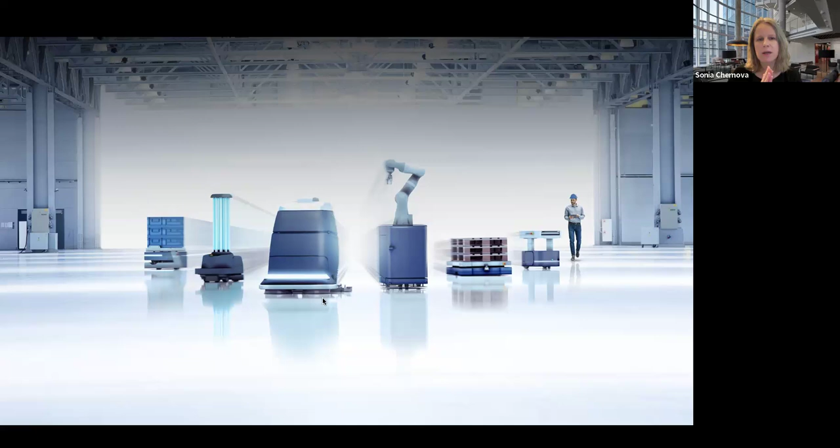The way I'm going to structure my content here is to use this lovely summary put together by some of the venture community, credited at the bottom. It talks about the different waves of adoption, or different stages of development, of what we call embodied AI or robotics, whatever term you want to use. I prefer robotics personally, but embodied AI makes a lot of sense as well. We'll talk about these as we go.

I'm going to spend more time on the current stuff, of course, but I want to go slowly because it's really important to understand the context of where we are by understanding where we came from. So let me start with...

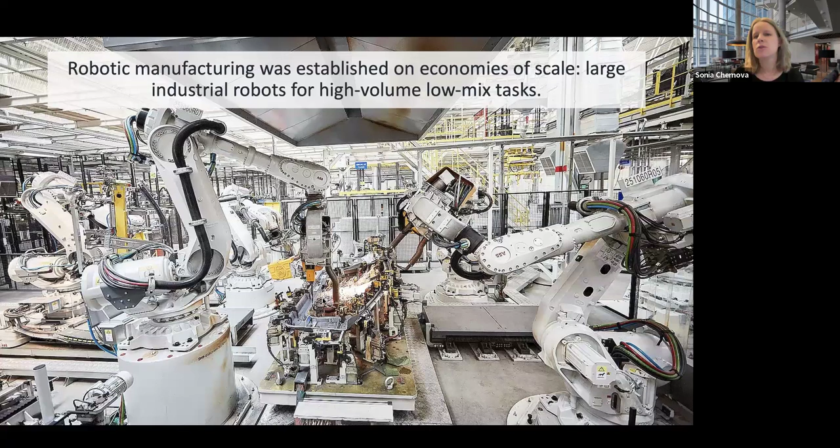Very traditional, what we would call at this point old robots. This was in the 80s and 90s, when we really saw the adoption of robots. I just have one picture I want to show for that, and I think this picture captures those types of systems.

These were very large, heavy machines, very high power, high voltage. If you pay attention, there's a wall here, a mesh wall — people are not allowed in this space. These robots are very fast, they're incredibly precise, which is wonderful. They spurred entire new innovations in car manufacturing and everything else.

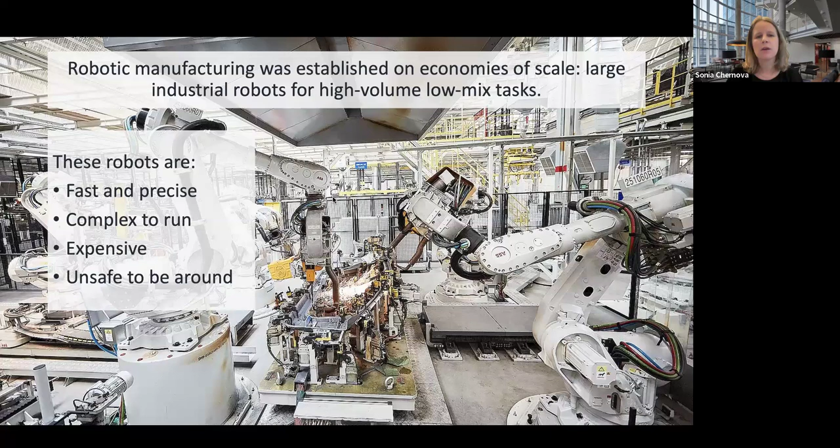But they were very complicated to run and remain complicated. Many of them are still operating. They require specialized software, specialized training, specialized engineers. And the biggest factor was you had to design a factory around them — you couldn't put people in the same space. They weren't movable by any means, they're very, very heavy. So this is where we were in the 80s and 90s.

That's all I really want to say, other than that, okay, we've changed — the world has really changed. So let's look at what happened in the first 15 to 20 years of this century, roughly since the year 2000. A lot of my conversation here will focus still on manufacturing, but also logistics, because those were the big success stories of that time period.

If we're going to look at robot arms, just to contrast this with the previous picture, what you see now for robot arms compared to those giant industrial ones are what we call cobots. If you're not familiar with the term, it's quite important in robotics.

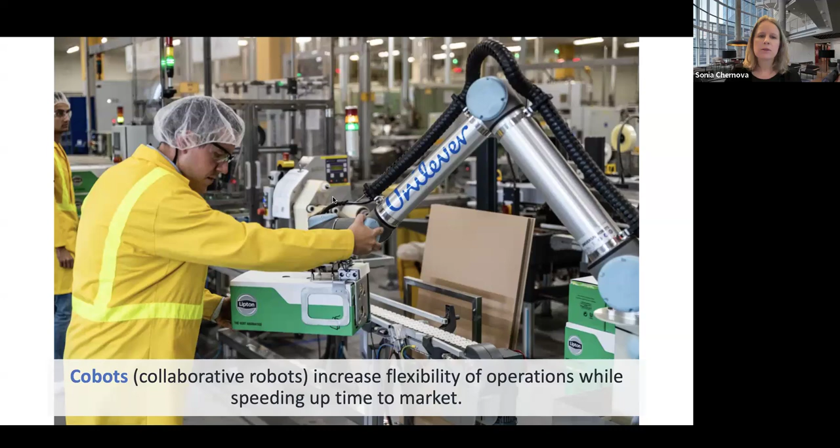Cobots just means collaborative robots. And these are still robot arms, but as you can see, people can be right up close to them. They can touch the robots, push the robots around, and teach them. Here, I'll show you a quick video.

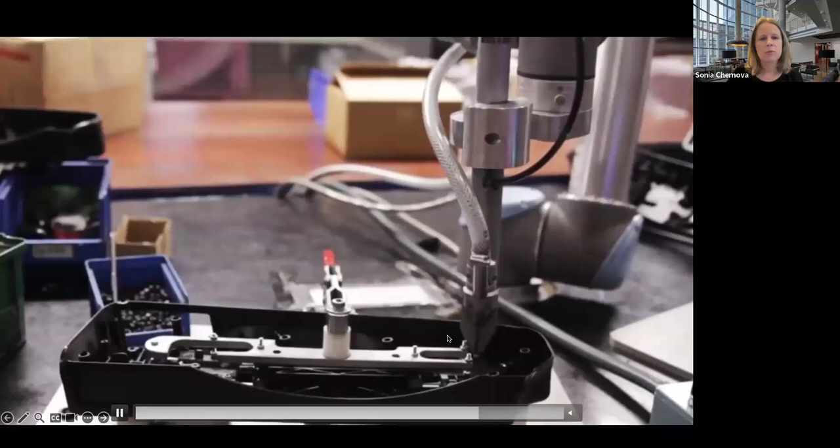But you can see these robots are doing all kinds of tasks, and people are right there with them. There's a person right next to it. This robot's going to apply what looks like solder or glue, fetch materials for a worker, whatever it is. So really it's changing the paradigm of how we view robots.

Instead of people in one place and robots in another, we're bringing them together. And this type of product, a cobot, is available from pretty much every major robotics manufacturer that produces robot arms - European companies, Asian companies, US companies.

Now, they're smaller, so they don't entirely replace all the big things. We still need big robots for giant car parts or something else. But for many manufacturing and logistics tasks, picking things up and moving them, these work really well because they have a payload - the bigger ones are probably close to 15 kilos, which is not bad for most things.

They have a smaller reach, about 1.5 meters most, and most of what they do is much closer than that. So if you need a bigger reach and a bigger robot, you're going to have to move to something bigger, more traditional, more dangerous, likely needing to be caged. But for smaller tasks, we have cobots. This has been a huge innovation in the mid to early 2000s.

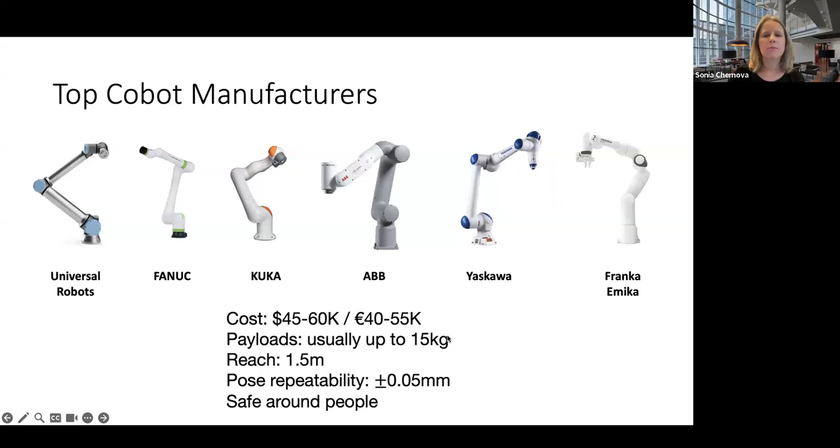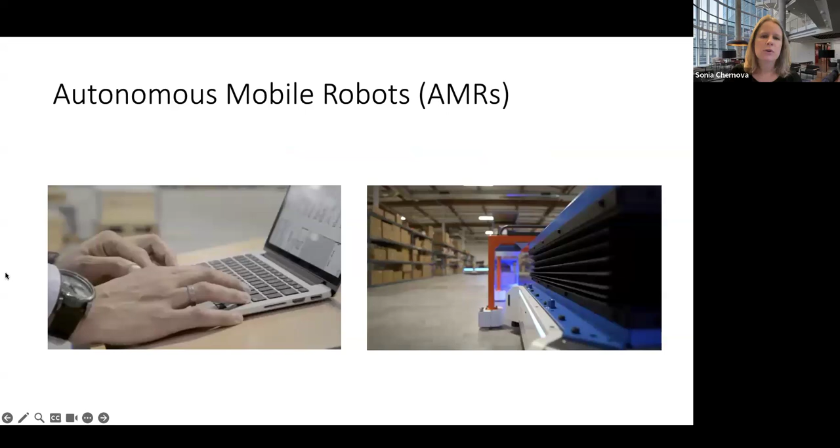At the same time, we also developed more and more intelligent navigation platforms - what are called AMRs, autonomous mobile robots. So we see more and more warehouses and logistics operations where people don't have to walk long distances, but instead use small transport vehicles like this to carry packages, or the robot can actually lift an entire shelf unit and bring the shelf to the person.

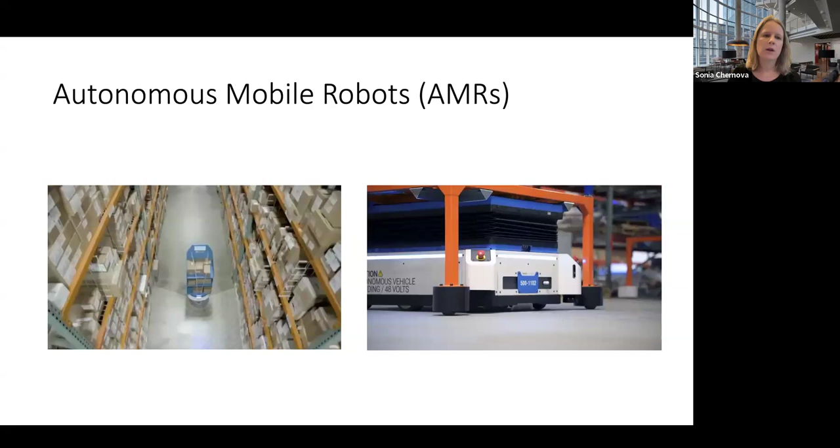There are many different variants of these technologies, but all of them integrate nicely within current warehouses and distribution centers. You don't have to change a lot. They can drive around other people and vehicles, and they save a lot of time and effort, and they self-charge and so on.

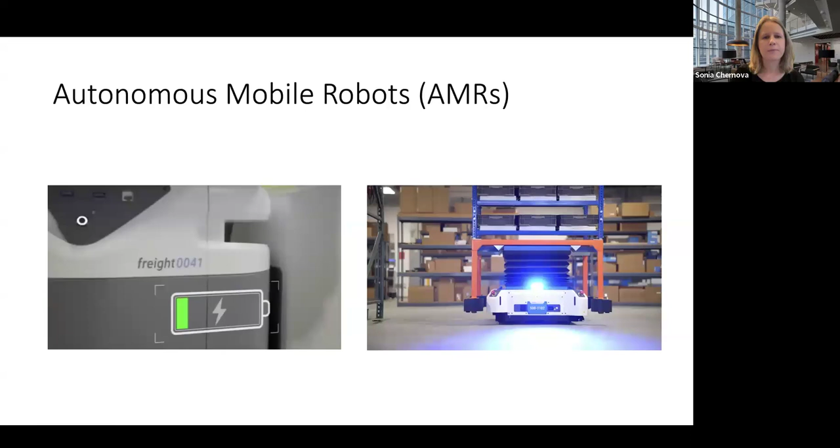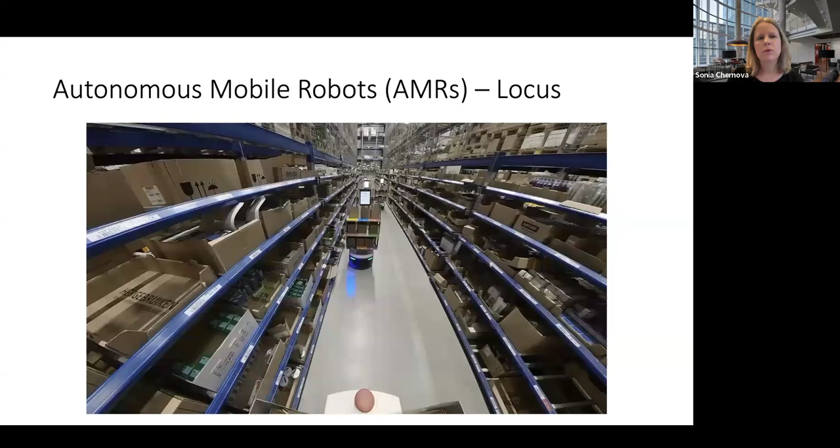Here's a quick example of one. This is a pharmacy or pharmaceutical company - they process medications, and this is a video of some of their robots. Again, what we see is that the warehouse becomes a little bit more empty of people. Some people are still here putting things on and off, but for the most part, it's saving them a lot of time walking around and carrying things, making all operations much more efficient.

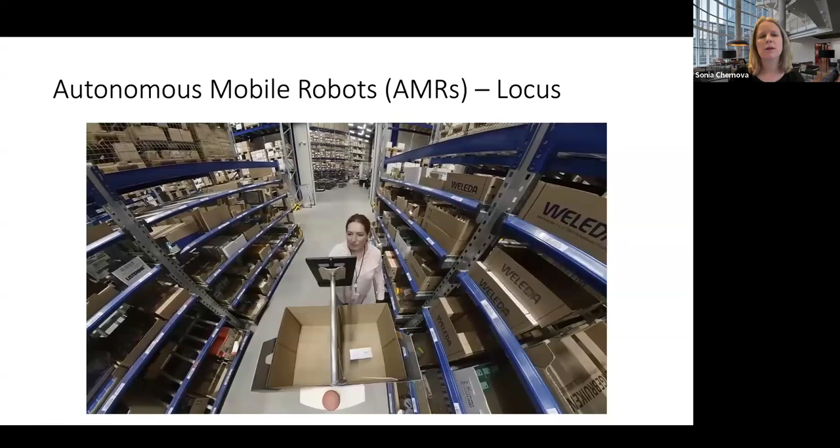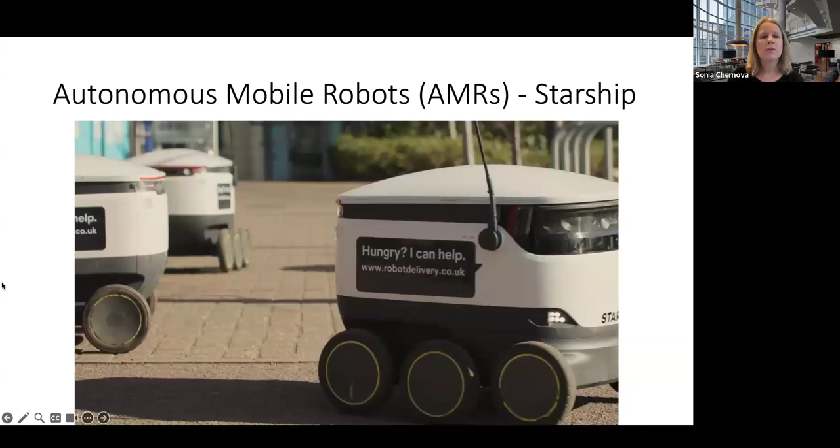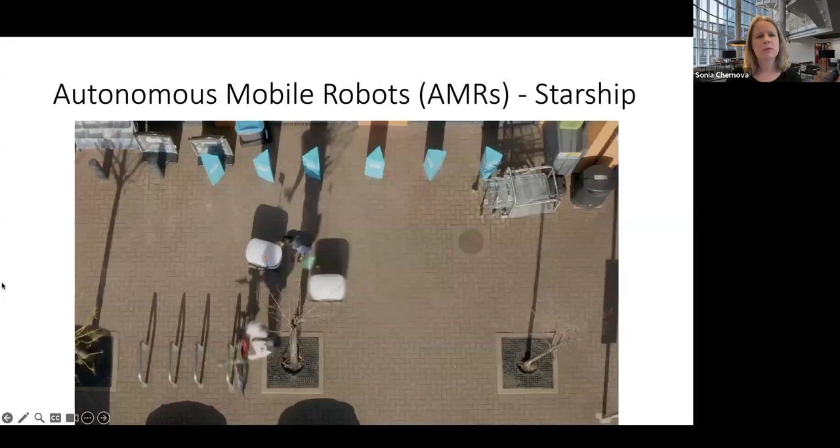Now this is not limited to just warehouses. You might have seen this type of robot - this is Starship, started in 2014 by the founders of Skype. Originally, I think they were headquartered in Estonia, and now they're headquartered in the US but operate out of Europe. My university has these robots delivering food all over campus right now.

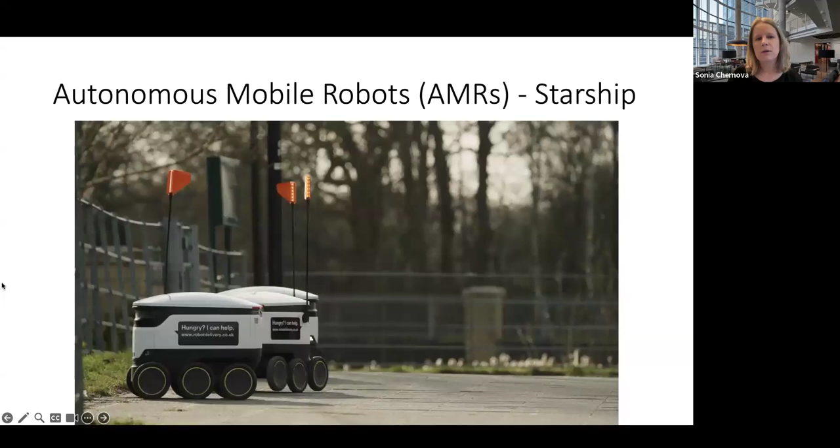So we also have, of course, street robots. Now, you might be wondering - I'll point this out - but please note that I've shown you arms, robot arms, and I've shown you things that drive, and I'm not showing you anything that does both. There's a reason for that, because that's a lot harder. We'll come back to that.

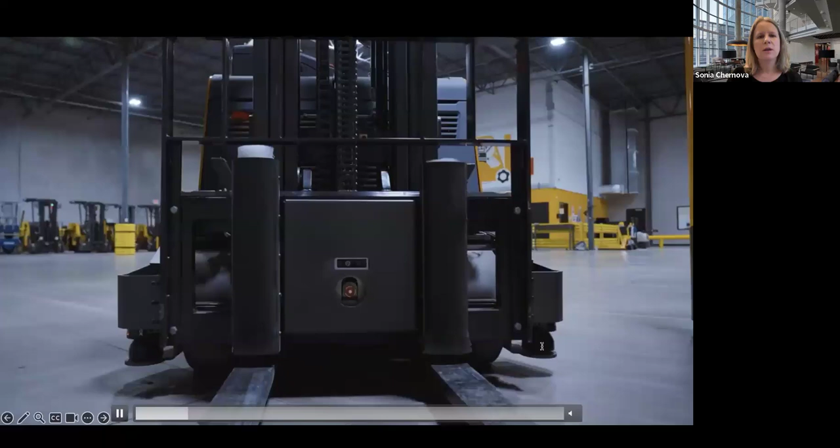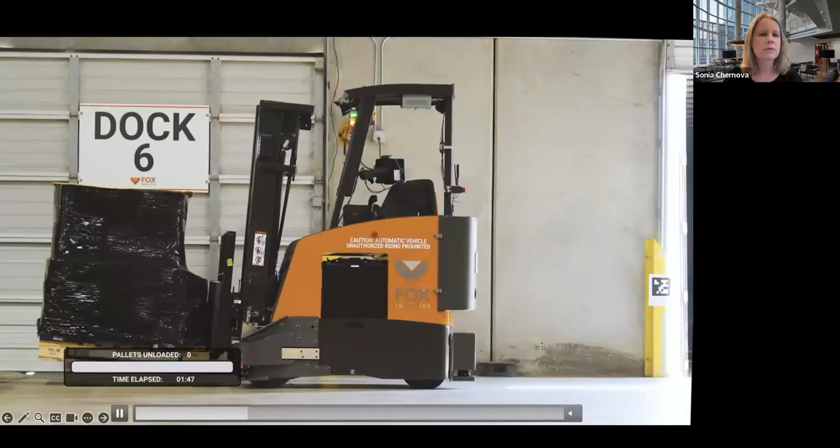I like this video because it shows off the size of the sensors, kind of gives you an idea of what's happening. These are autonomous forklifts that just move pallets of goods in warehouses. They keep going and going, and lots of boxes are being moved by these fairly large, heavy, and fairly dangerous equipment. So the safety record on these is very high.

We've been working our way through logistics, warehouse automation, distribution centers, and that's been the success story of robotics in many ways for the last 20 years, and it continues to be. Some of the companies I'm showing you, I'll show you 3 more in a second, were all started in that period.

So what have we talked about? We've talked about autonomous forklifts for loading and unloading trucks, robots that move shelves, robot arms that pack or unpack boxes, or move boxes from one conveyor belt to another. The one thing I also want to highlight on the logistics side is this kind of setup.

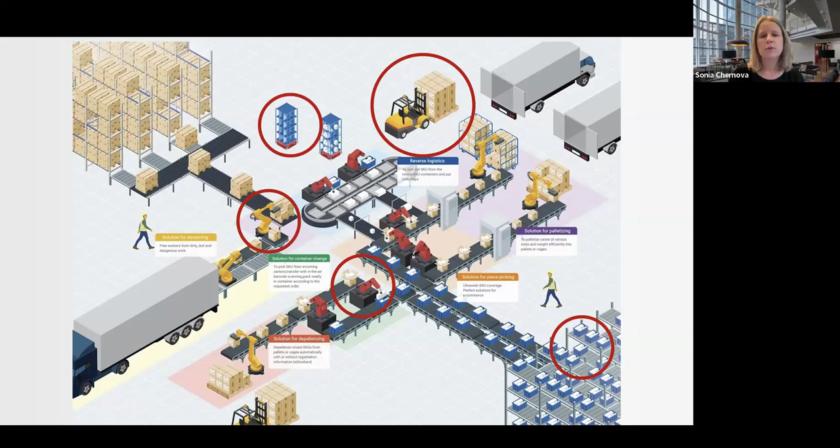This is called automated storage and retrieval, and this is a different type of embodied AI, very different type of robot, where the entire environment is changed. With all the earlier ones I've shown you, we've tried to keep the warehouse more or less the same, just adding the robot to work alongside workers, without requiring a complete change of the warehouse itself. Now let's throw that assumption out the window.

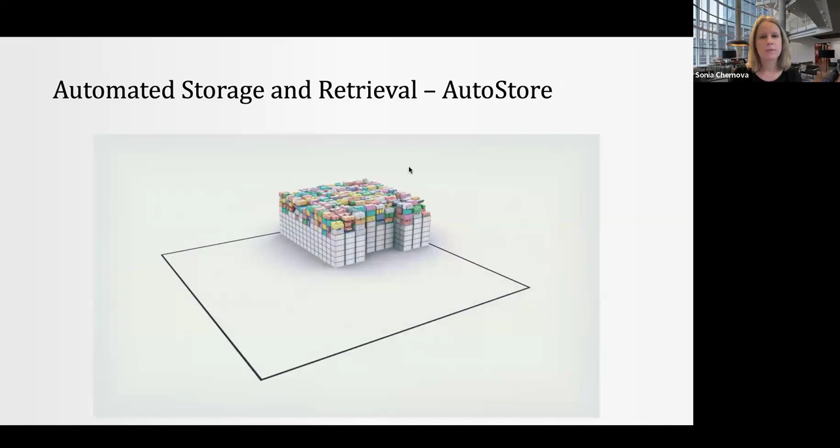Why waste time on shelf-based solutions when AutoStore is here? AutoStore is a cube-based system, making use of all space for proper warehousing. Turn that wasteful air into storage and double, triple, or even quadruple the inventory capacity without moving to a new building.

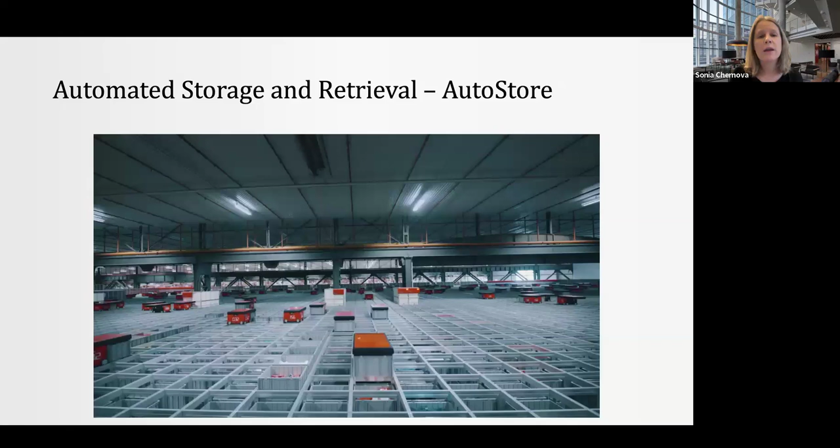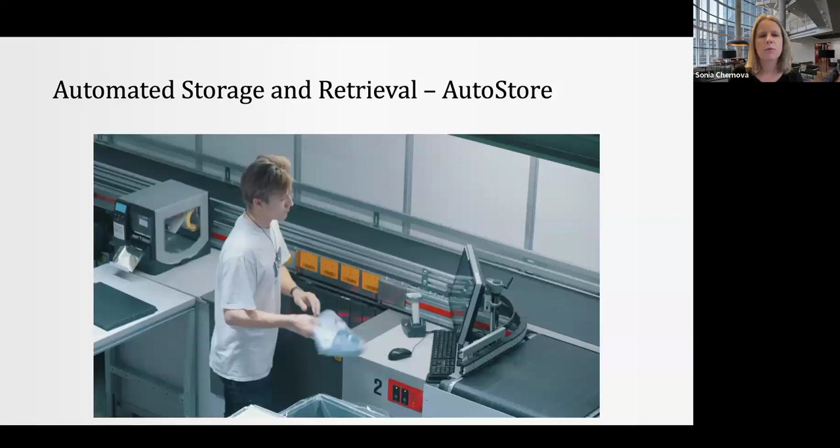I'm going to mute the audio now, but this is the idea of why these kinds of solutions are practical: it's because of space efficiency. With the same amount of land, you're able to roughly triple or quadruple the amount of product that's being processed, and potentially the rate of that product.

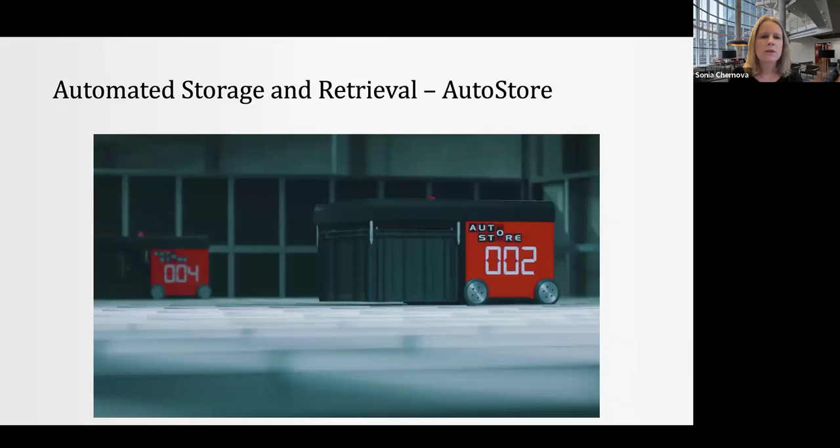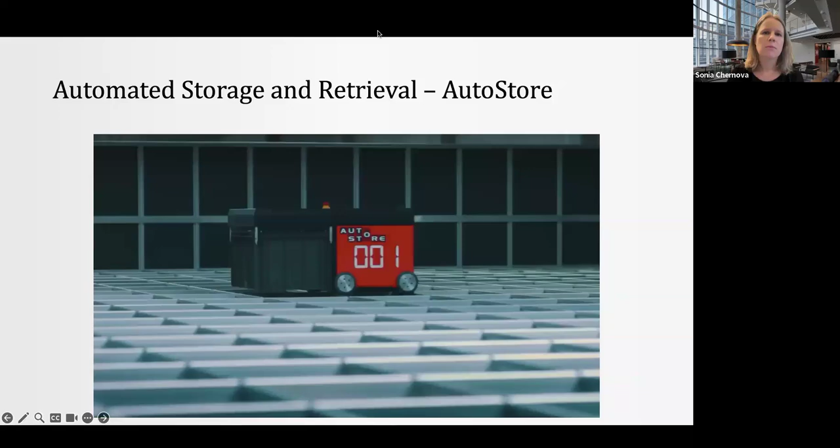AutoStore was started in 1996, I believe, in Norway. They use a vertical system of stacked boxes and simple robots that lower and raise boxes within these bins. One limitation of this particular solution is that it can only handle smaller objects. But you can imagine other solutions that could focus on larger items, and I'll show you that in a second.

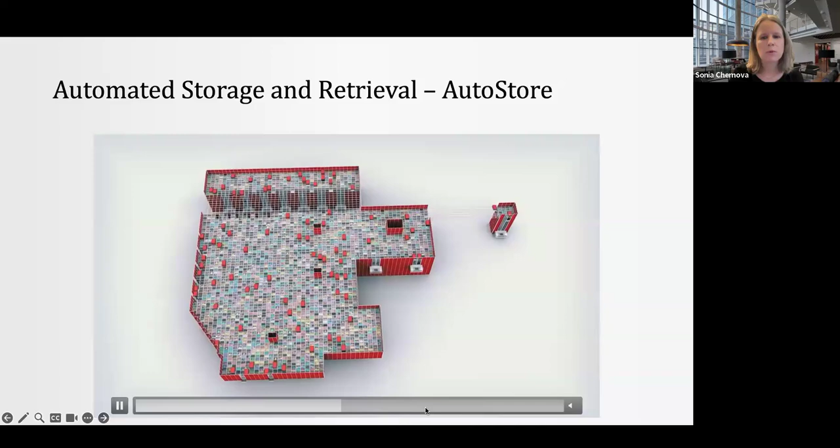Before we do that, I want to show you another company you may be familiar with: Ocado, out of the UK, founded in the year 2000. Again, you get a sense of when things were founded, and it probably took most of us another 10 years before we really heard of the company, from its founding to when their product was mature, useful, and practical.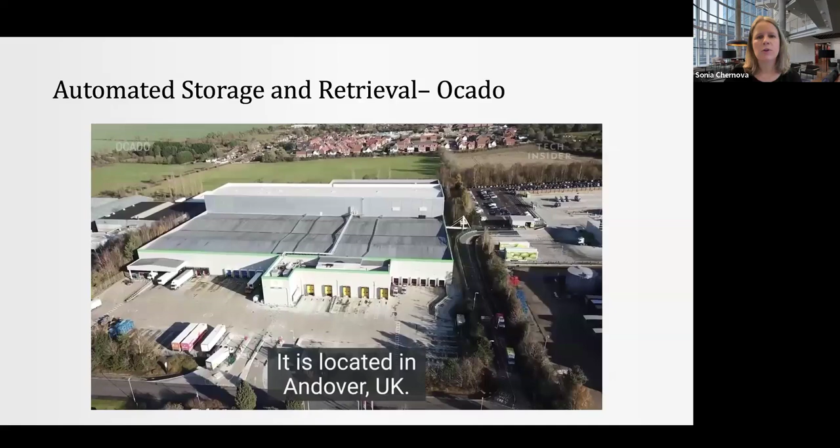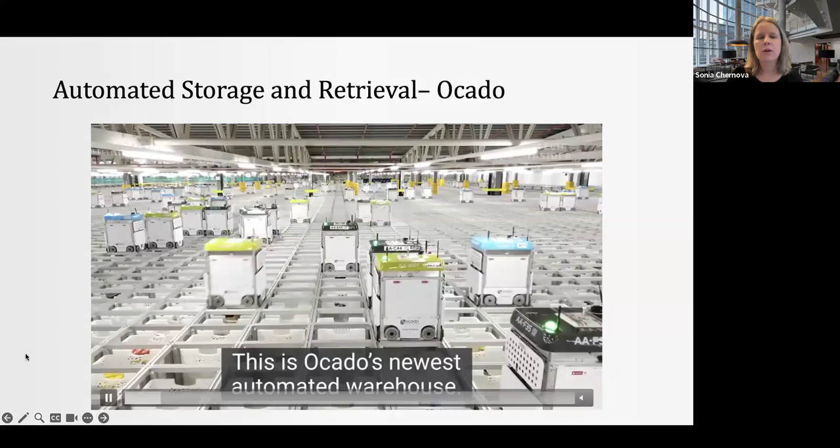This is groceries. They're doing the same type of grid layout, but automating the fetching and delivery of grocery orders. Many of us know we can now order food online and have it delivered, and that's part of what they do. They can service entire grocery stores as well.

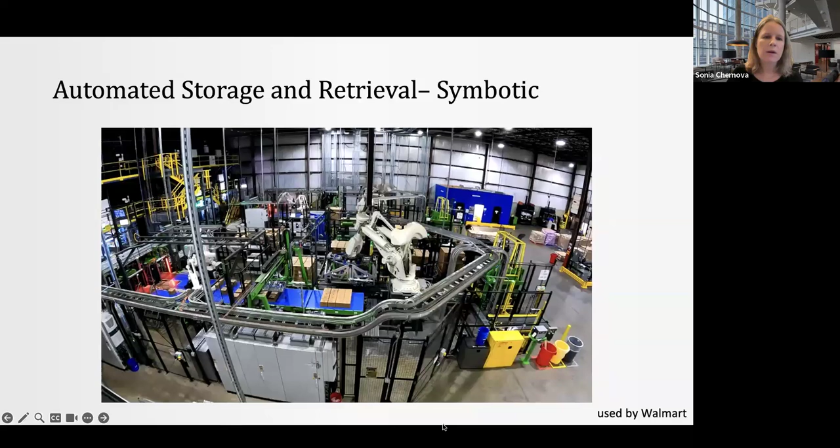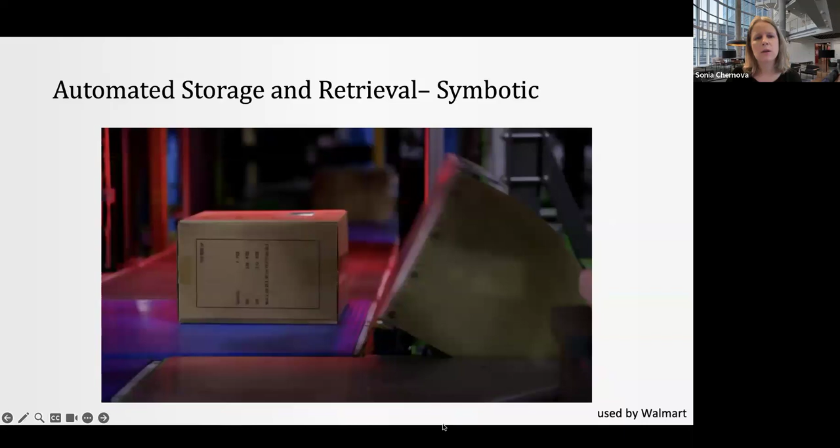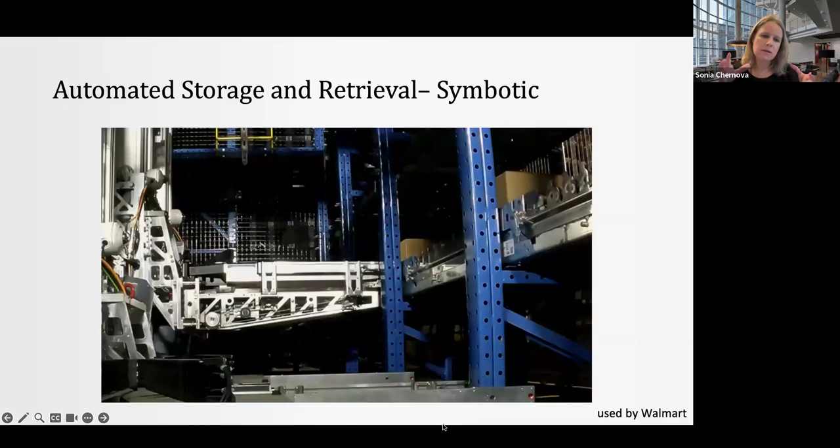Going back to the warehouse, this is a video from a company called Symbotic, founded in 2007 in the US. They are currently in the process of automating all of Walmart for the US, which is our largest store group. The reason I wanted to show this one is, unlike the previous examples which were very rigid in terms of bins and structure requiring a grid, Symbotic is a little bit different.

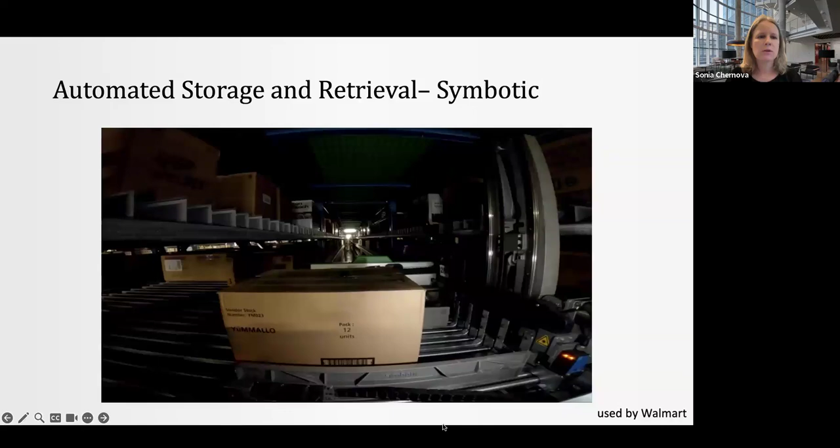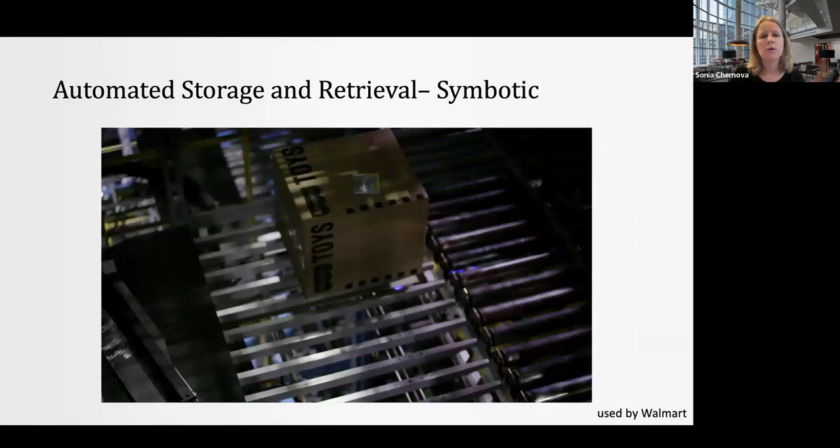They build about 9 to 10 floors of shelving, but they store all kinds of boxes in that shelving. They don't use special boxes, they just use the products themselves. You can see there's diapers, coffee, shampoo, all within these walls. I've actually been to either this center or one of the other ones in this video. It's really very impressive how they handle this.

And so that's just the storage. I want to show you part 2 of this video, showing how they automate distribution centers. A distribution center handles many, many stores, close to 1,000 Walmart stores. So when a store says we're out of toothpaste, dog food, shampoo, or chips...

...that particular store sends in their order, and this distribution center is in charge of building the pallet or multiple pallets to be delivered to that store in a truck. So they have to get the goods out using those little robots you saw, then build the pallet. It used to be people would do this.

These pallets are very, very tall, much taller than I am, and you have to carefully balance them. This is that process, really fun to watch in person. Hopefully you'll enjoy it on the video - what you see here are 2 very large arms, I think they're ABB arms. Behind here is that wall, that vertical wall of robots moving boxes down dark hallways.

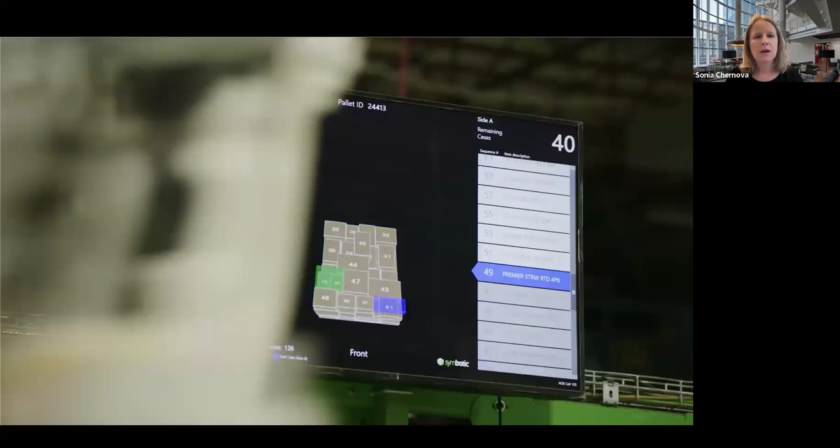They bring packages, and here we see what happens is that these robots then play Tetris all day. They build these giant pallets, and you can see the pallets growing as a new box arrives. It decides where to place the box, and then the entire pallet is delivered on a forklift. It's a very cool process. Then they shrink wrap it like this. So everything is automated, and there we go, they've finished.

This was a very short video, but it's very, very cool to see this process of how it plays basically what I would call Tetris. It's really, really fun.

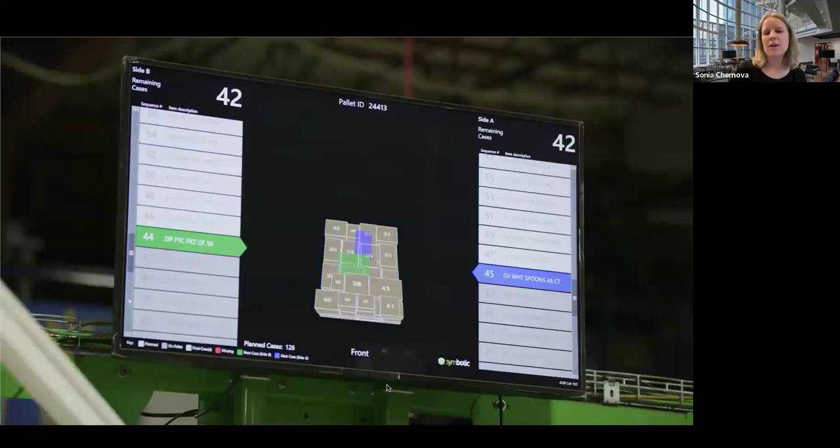So I've talked a lot about logistics. Let me take a break to summarize logistics, and then I'll move on. But this is really the big success story for robotics. For the last 15, 20 years, it has enabled all kinds of globalization, customized orders, and things like that. And what I've shown is a range of technologies, and they have different pros and cons, which are fairly obvious. Just want to point them out.

There's a lot more autonomy happening on this right side. Once you have an entire warehouse that's really customized, everything's very autonomous, and it's actually very, very productive, but it's relatively harder to integrate into your system.

It requires a lot of change to the business, to the warehouse, and things like that. If you want minimal impact but still a productivity boost, these types of systems, like the AMRs or the arms, are much more easy to integrate. Now, I want to highlight that all the success stories are either navigation or arms, or what we call manipulation in robotics. We don't have many success stories that mix both. The only way we mix both is by building environments like this, where we can do both picking up things and transporting them at the same time.

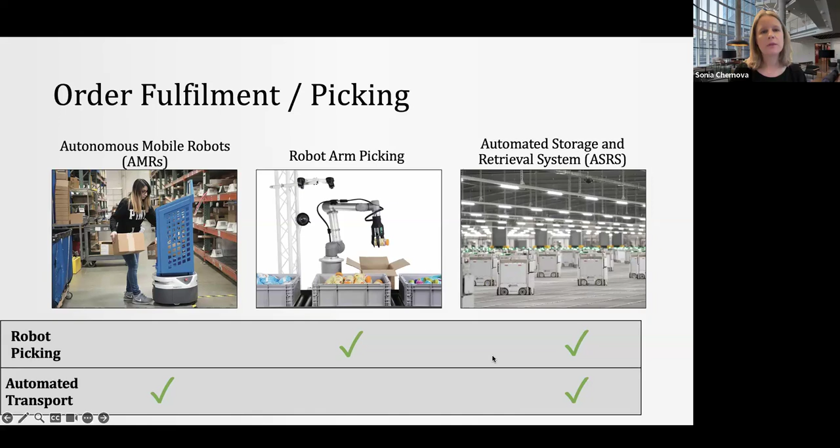This is where it'd be much more fun to be in person, but the answer is structure. If you want to know, whatever you work in, if robotics would succeed there, think about the environment, the problem you want to solve, and structure. Autonomy is facilitated by structure.

The biggest success stories today are either that we keep things really simple and the robot just has to navigate, like the top left, right? The warehouse structure, the warehouse layout is the structure. Or we start to put things in bins and make them all sort of the same size or shape, or known shapes. Or if we want to deal with a more diverse set of products, we start to actually structure the environment. So there's really not a one-fits-all solution at the moment. We have to sacrifice something, but if we can have some sort of structure, then we can have things work.

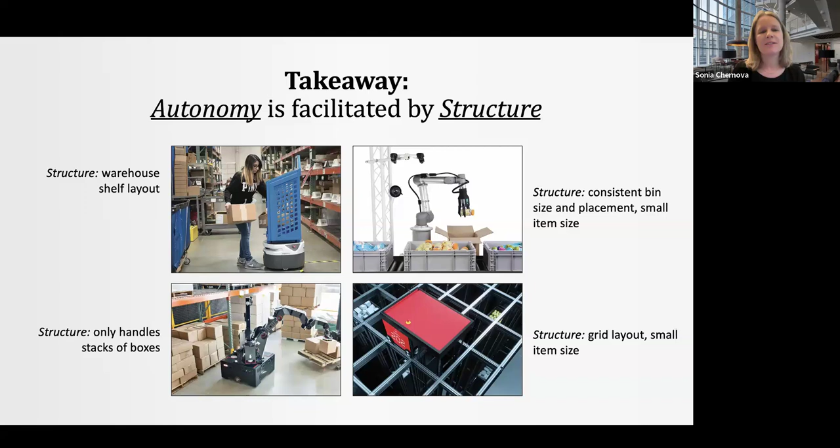Now let me show you a few exceptions. I've talked about logistics a little bit too much, maybe, but that's the big, exciting success story. Let's talk a little bit about outside of warehouses. There are success stories outside of warehouses.

Hospital robots. We have an increasing number of hospital robots. By the way, this is the only robot I'm showing you right now that has wheels and an arm. It's a really fascinating story behind this company: Diligent Robotics, founded in 2017 here in the US.

And they initially thought that they would use the arm to fetch items from storerooms, get things off shelves, or put items back on shelves for nurses and things like that. And after a couple of years of deployment, absolutely not. It didn't work. It's really hard to do what's called mobile manipulation, combining manipulation with a navigation platform. It remains a really challenging problem.

Nurses were not happy with the results, and they actually didn't need that. What they needed was more effective transport across hospitals, because they're walking such long distances every day to just take a sample to the lab or fetch some more bandages or whatever it is. And when they moved to that application... this is the only hospital robot I know of that has not gotten rid of its arm. They kept the arm because of all the many places they use it.

They've used it about 10,000 times a month across all of their robots to do things like press elevator buttons or open doors. The robot actually has a badge to open doors for when they're locked. So the arm is very useful. I could talk more about it, but it's a great application.

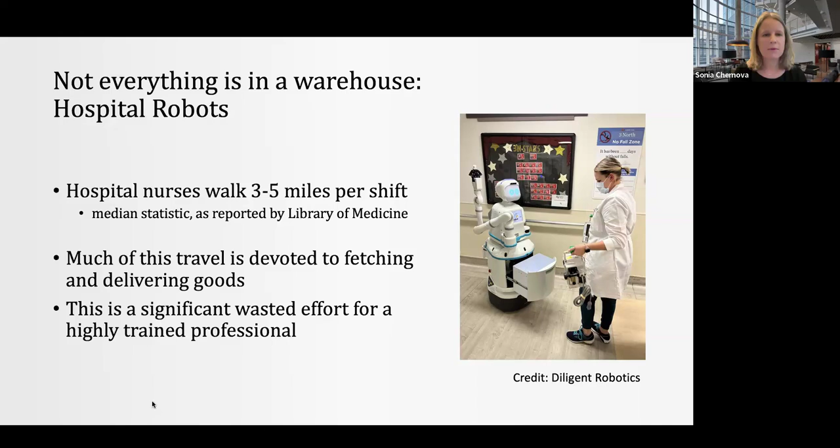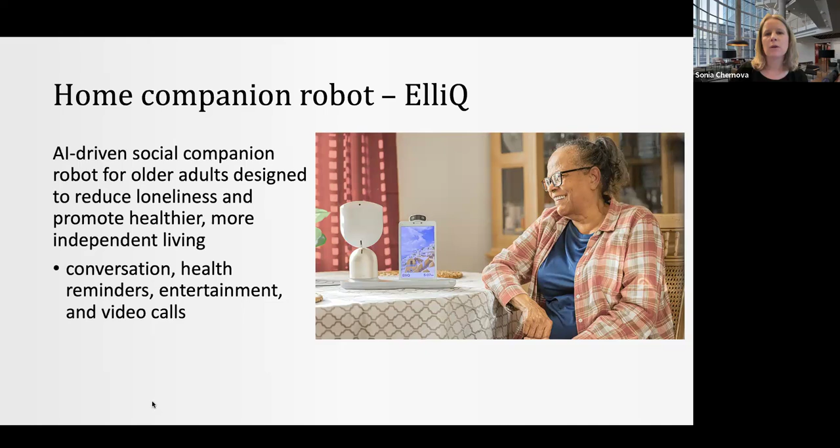Several companies in this space. Home robotics, not a lot of success stories in the last 20 years. We're not going to talk about vacuum robots, that's obvious. We have companion robots, for example, for older adults. And then we also have inventory robots for grocery stores, which were really explored during the pandemic, but are not quite as common as they could be. The technology just has not really paid off.

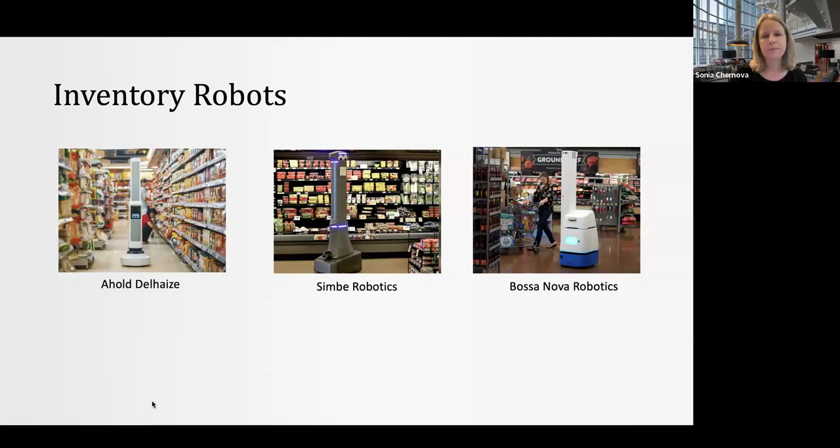Okay, so that was the 2000s, the early 2000s to mid 2000s. I want to now just finish up by talking about the last few years and where we're going, merging these current waves of innovation, and how do we get beyond logistics into more unstructured environments?

And if you pay attention to the news about robots, what you will have seen is something along the lines of humanoids, more humanoids. At least in social media, LinkedIn, and other areas, we see a lot of talk about humanoids right now, and they're certainly taking a lot of VC funding. So let's talk about that first. It would be strange not to.

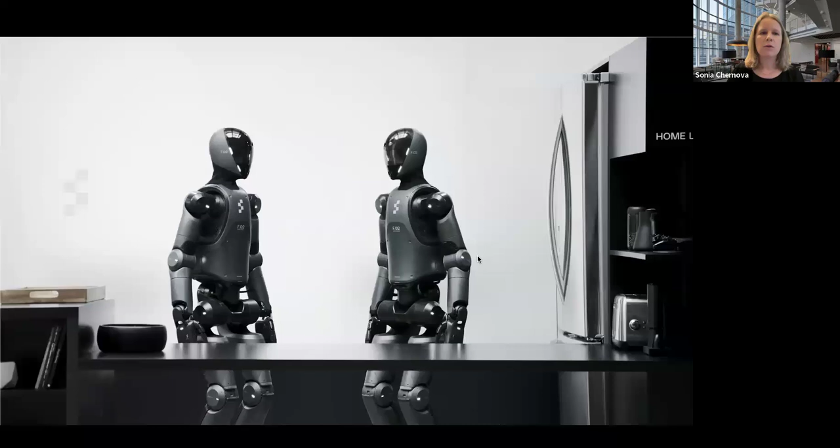Let me show you one of the coolest videos on humanoids. This is from Figure, which is, I think, 3 years old now as a company. What they're showing here is something called Helix. It's a vision language action, a VLA model. Think about it like an LLM, like a ChatGPT for robotic systems. This is a single machine learning model, right? Everything here is embodied AI, cutting edge stuff. Not so much about automation, but really pushing the AI capabilities of these systems. So this is a single model operating the system that combines perception, language understanding, and actual control.

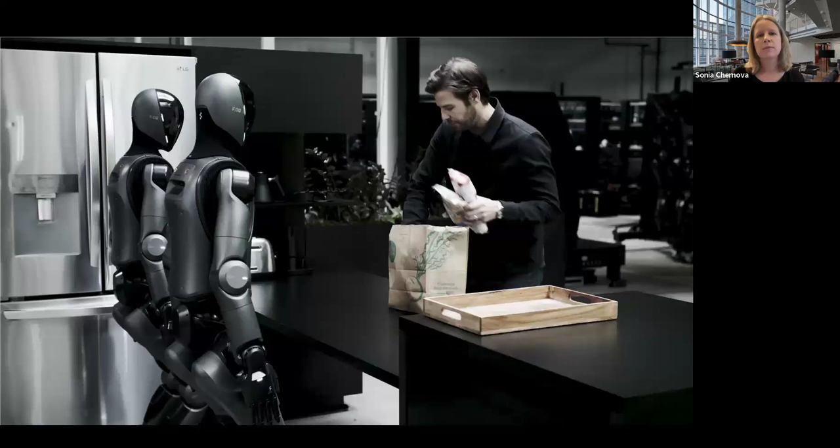Hey figures, can you come here? Okay, I'd like to try something new. Even though this is the very first time that you've ever seen these items, I'd like you to use your new Helix AI and try to reason through where you think they belong in the scene, and then work together to put them away. Does that sound good?

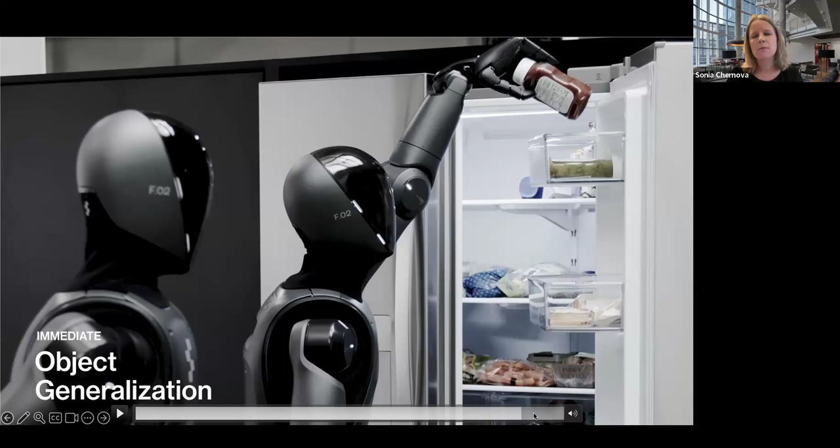This is a really cool demo. This is not a product, right? The difference between a product and a demo, but a very, very cool demo that is aiming towards this idea that's at the forefront of a lot of people's minds, which is robot foundation models. Can we build the ChatGPT of robotics? What is it? What does that look like? What is it like to have a single AI model, a generalized AI model, that controls all kinds of different robots, simulated robots, real robots, underwater robots, logistics robots, to perform all kinds of tasks? The idea is that this type of model would be like a brain. It would integrate not just language instruction, but camera data and sensor data from accelerometers and touch sensors and whatever else, and produce motion for all of these types of robots.

And unsurprisingly, this is really hard. Really, really hard. For the big jump to large language models that we've had in the last few years, we've been using billions of text examples and billions of image examples for vision and language models. We don't have the internet of robot motion. We've tried. There've been a couple of projects, one called RT-X, that tries to combine data from 25 different research groups, all the data that they have. And even with that, it's not nearly enough. You get some cool results, but they're not anything I would run in a real world setting.

So the question is, where do we get, if we want the robot foundation model of the future, where do we get it? We can put robots out in the real world, right? So here are our options. We can put robots in the real world - great, very high quality of data. But the problem is it's going to be super slow and very costly. But China just opened a training center for robots in this way. They have an entire huge building where robots are just going to be learning and practicing and collecting data in this way. So there are definitely approaches to this.

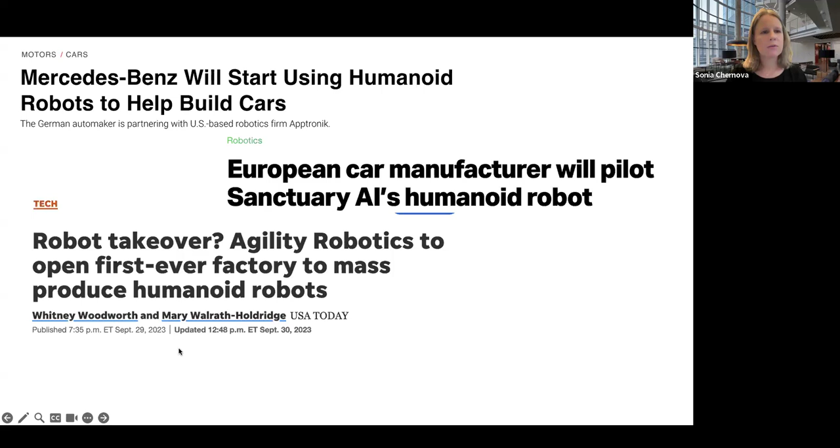And you see this in the headlines, right? Everyone wants to have a little bit of this coolness factor. There's Mercedes, will be using humanoids. Someone in Europe is doing so, I think BMW. And then here it is, Figure's. The Figure ones, which I just showed you, the black robots, are going to enter the workforce at BMW. And then you see other headlines. Everyone wants a humanoid.

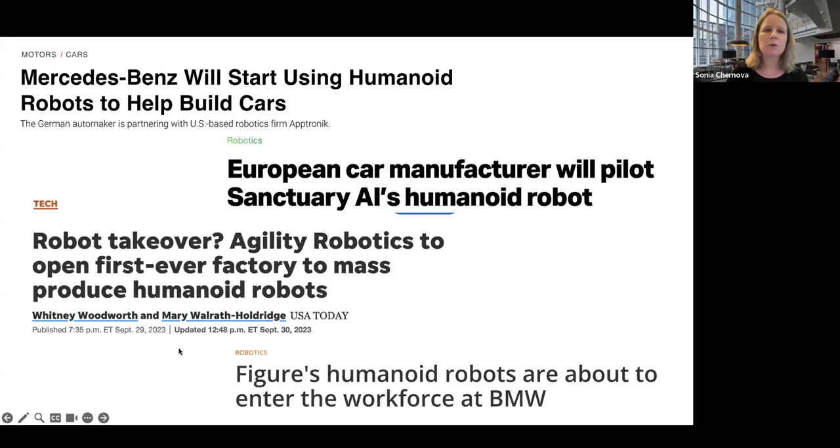But what they're going to be doing exactly is a little bit unclear because their motion is very slow, and the dexterity, those dexterous fingers that you see on those robots, actually make it really, really hard from a computational aspect to get robots to do anything. We have no idea how to control fingers particularly well. We know how to do things basically as claws, open, close. Dexterous fingers are just still not quite mastered in the robotic space, and they break a lot.

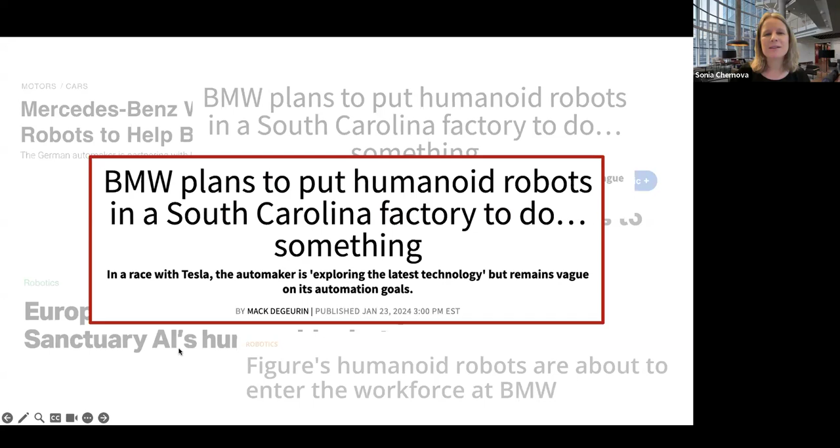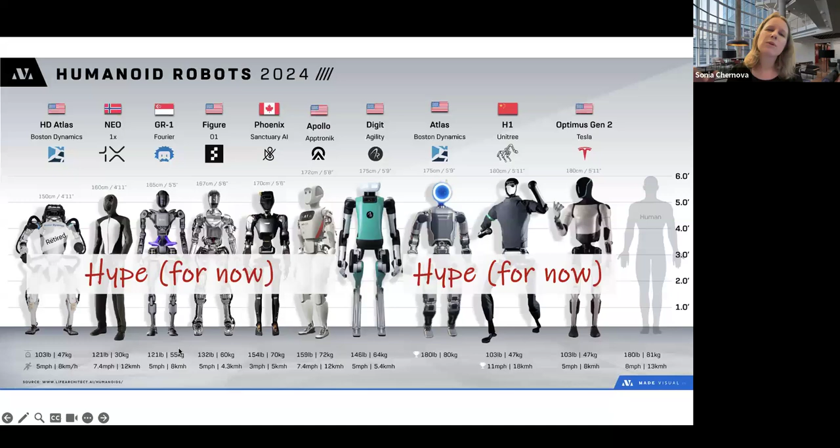So the question is, what are all these humanoids going to do? Right now, it's the next big wave, and it's going to happen. But if you're asking about today, 2025, I would say that most of these are right now hype. They put out really, really cool videos. They put out cool announcements about working with factories.

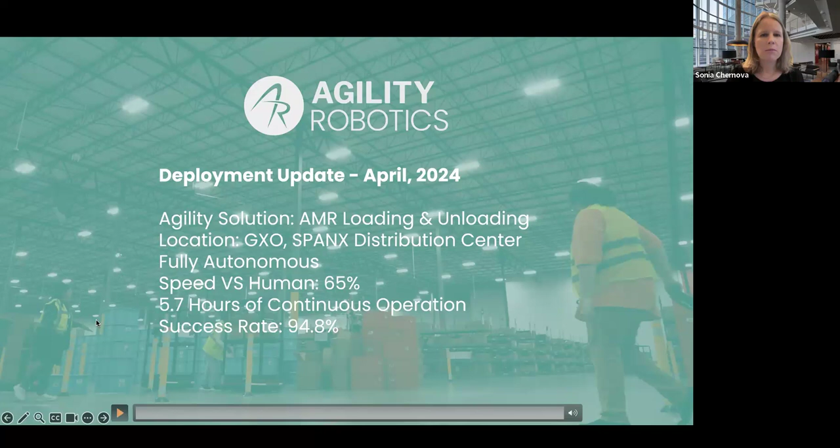There's very few companies I'm excluding from the hype, and that's Agility. The reason I'm excluding them is because of this - you can go on the internet and find videos, oh this is old, I forgot to update it, this is 2024. A year ago they were already putting up YouTube videos showing roughly six hours of continuous operation of their humanoid robot in an actual business setting.

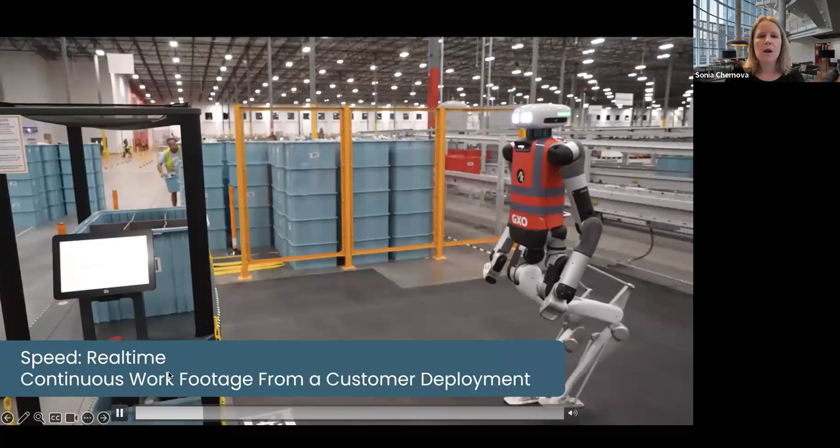And we're back to structure. This is another logistics kind of scenario, but you have in the background workers picking up these bins and moving them. And here they have Digit, the Agility robot, picking up these boxes. If you pay attention to their configuration, they don't have fingers, they have little grippers, much more practical.

They're a little less actual humanoid - they look a bit like a cross with insects, but for mechanical reasons this is much better. So they're going for function over form, and as a result they actually have a product that's being mass produced and mass deployed. This video is very long, hours and hours of operation, and they have many of these videos online. So there are success stories, but of course it takes a lot of effort to separate the hype from the reality for this type of cutting edge technology.

Big trends right now, of course, are AI, machine learning, foundation model robotics. What I would call mobile manipulation is upcoming - the ability to navigate and put an arm on top, either as a humanoid or with wheels, is still up and coming. More cobots are still up and coming. A lot of digital twins I didn't talk about, but that's a variant of simulation. All of these things are kind of where we are at right now.

And if you want to learn more, I'll wrap up and take questions. There's a couple of really nice websites - The Robot Report, International Federation of Robotics - they synthesize and put out reports regularly. There are a couple of large events in the US, probably RoboBusiness is the biggest international one. This year it was in the US, and this one was held just about a month ago. There's others, and I'm sure there's others in Europe too. But these events are the place where you can meet a lot of people and learn more about these technologies. And with that, I will open it up to questions.

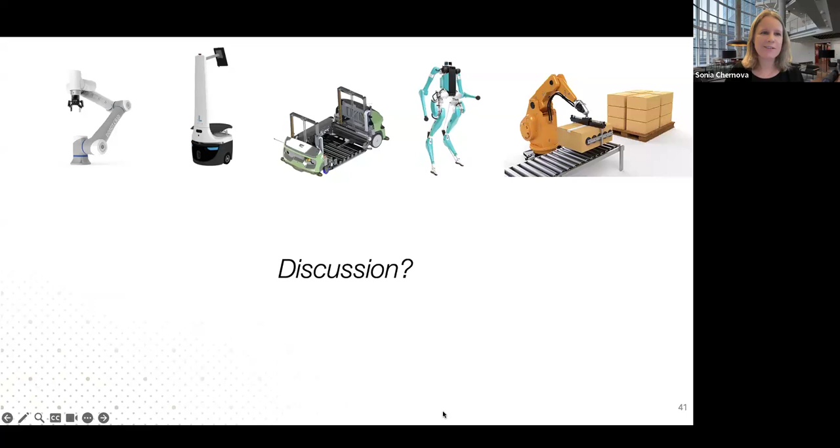I'm happy to discuss all kinds of different robots. And thank you for listening.